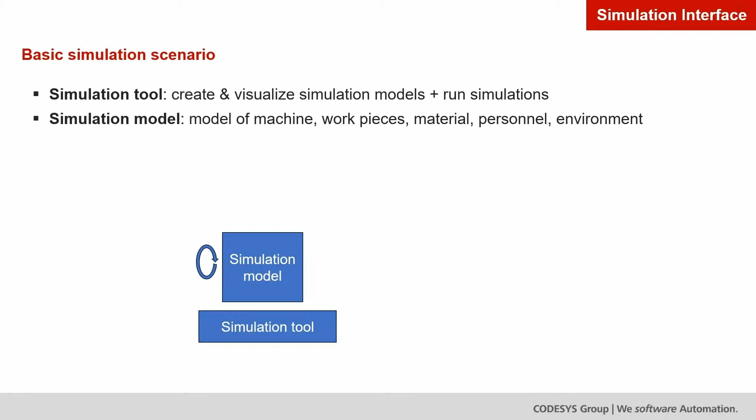It's based on a research project, Software-Defined Manufacturing, funded by the German government. The basic simulation scenario is a simulation tool which creates and visualizes the simulation models and runs the simulation. The simulation model is a model of the machine, the workpieces, the material, the personnel, the environment, whatever. A PLC connector connects this simulation model to a simulation PLC, which is a soft PLC or actual controller with a simulation interface running the IEC application.

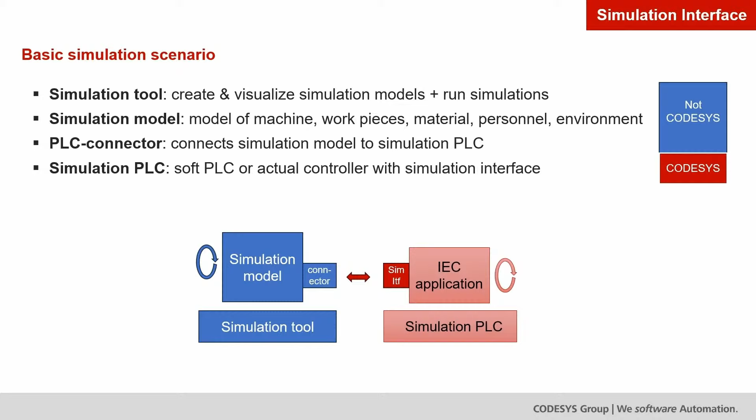The first three are not our product. Our product is the last part, the simulation PLC. A simulation may also include multiple PLCs, and these PLCs may run, for example, on the workstation of the application engineer, on some real-time platform, or even the original PLC used for controlling the machine.

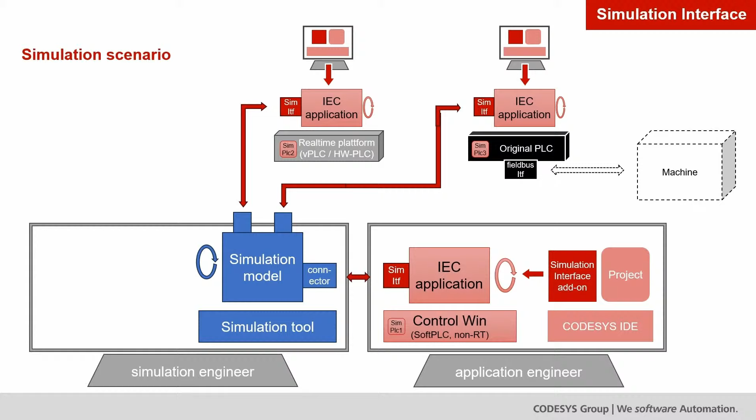The communication is done using OPC-UA PubSub, and the connection is established by an information model describing the simulation PLCs and their PubSub connections. This is hosted on an OPC-UA server, which might be a CODESYS Control Win. The information is collected from all the different engineering systems with the respective projects.

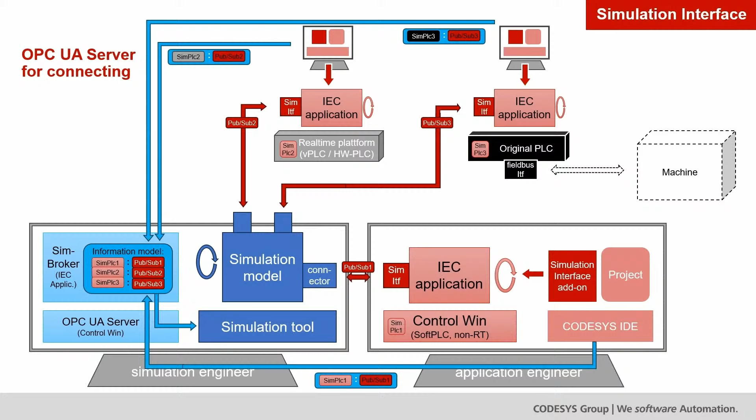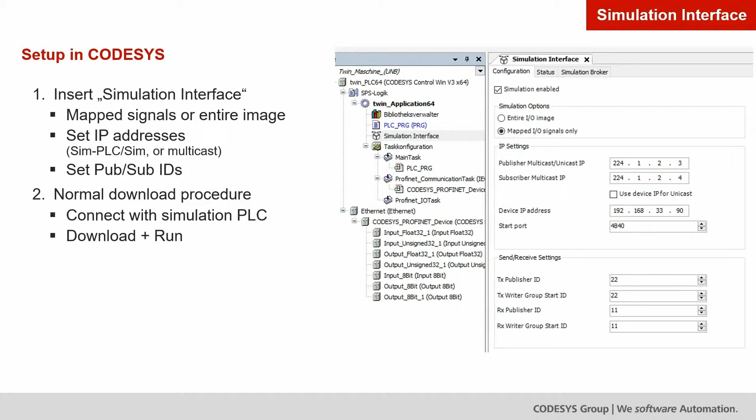The setup in CODESYS is very easy. You insert the object Simulation Interface, where you select whether you want to simulate all mapped signals or the entire I/O image. You set IP addresses for the simulation PLC and the simulation so they can talk with each other, or you define multicast addresses. You set the PubSub IDs to be used, and then you do a normal download procedure by connecting with the simulation PLC, download and run.

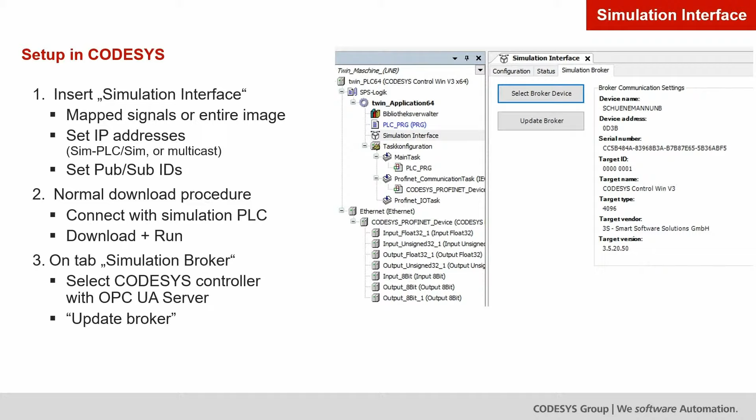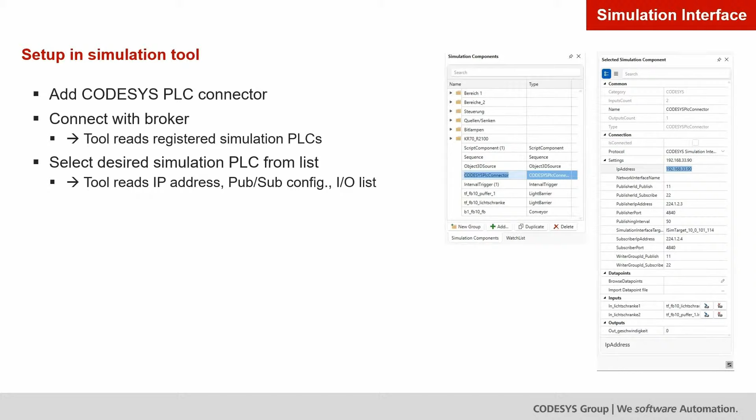Finally, on the tab Simulation Broker, you select a CODESYS controller with an OPC-UA server function as the broker, and then you update the broker, which downloads the information model. In the simulation tool, you need to add a CODESYS PLC connector, connect with that broker, and read the registered simulation PLCs. Select the simulation PLC you want to connect to. The tool will read the IP address, the PubSub configuration, and the list of I/O signals. Then you map the I/O signals to the data points in your simulation and run the simulation against the prepared simulation PLC.

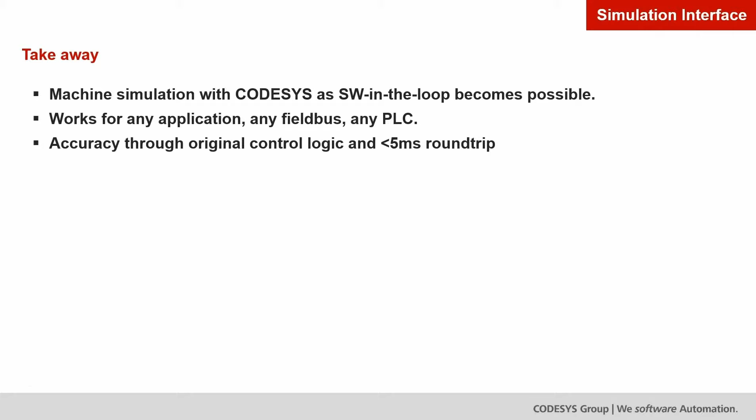Takeaways. The machine simulation with CODESYS as software in the loop becomes possible. It works for any application, any field bus, and any PLC. It is accurate through the original control logic and has a 5 millisecond round-trip time possible because of the use of PubSub communication. It's an easy setup. The application remains unchanged. You disable the simulation by a switch.

You use a file-less import of the simulation interface into the simulation based on the OPC-UA information model. All of this is based on OPC-UA mechanisms. You need an OPC-UA-based connector in the simulation tool. That's the point. There are prototypes which we showed at the SPS fair last year, and further simulation tool providers are interested.

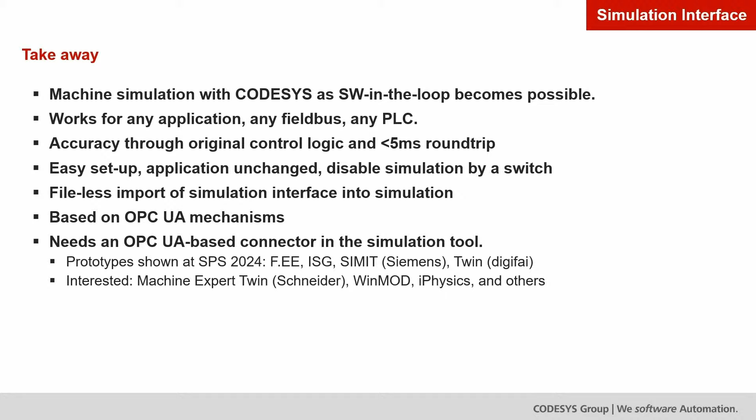Now, regarding the development system, I have to tell you something about libraries. There's an issue about updating rebranded libraries. Since SP19, new versions of libraries with vendor 3S Smart Software Solutions are successively rebranded to CODESYS. Updated libraries used in the user project, directly or indirectly, are updated automatically in SP20 and not updated in SP19, meaning they don't automatically get improvements.

Now, if an updated library is used by an add-on in the project, that is indirectly, and if that library in an add-on has a new version relying on new features of the rebranded library, like Ethernet IP 4.7 uses the new element collections 4.0, then in SP20 there's an automatic update of both, which is okay, but in SP19 only Ethernet IP is updated and there's no update of the element collections, meaning that you get a compile error.

The remedy is to manually update the library resolution in the project. In SP19, in Library Manager, you open the placeholder dialog and you update the placeholder for element collections. You select the version 4.0 with the CODESYS vendor, which is offered automatically.

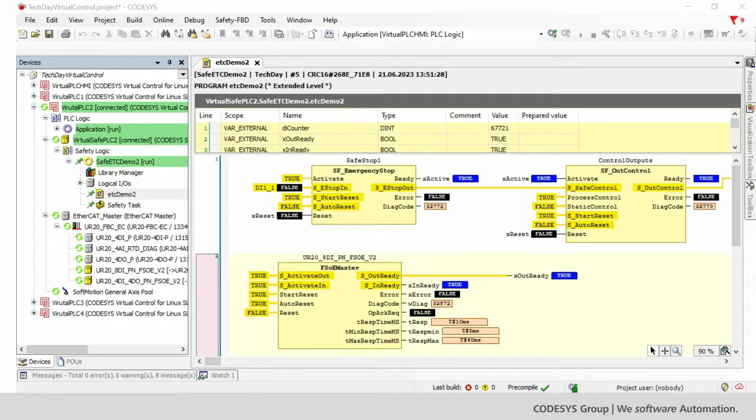Concerning the engineering of this new safety solution, there are no new tools necessary. As usual, you can still use the standard CODESYS IDE and work in the same fashion as you would with standard safety solutions. The performance of the Virtual Safe Control is also very promising. We tested the runtime with standard hardware and about 50 simulated PROFINET slaves and achieved cycle times of around 2 milliseconds.

Most of you have certainly followed the transition of the business model away from hardware-based licensing to our new application-based license model. We are also relying on this new model with the Virtual Safe Control, and we added a few new safety licenses that differ in terms of the number of safe connections. There is also a special PROFIsafe license for fieldbus communication.

Currently, the Virtual Safe Control can be used on x86-based devices in combination with PROFIsafe. However, we are also working on a solution for ARM-based devices and, of course, FSoE support. We expect to release these functionalities at the end of the year or early next year.

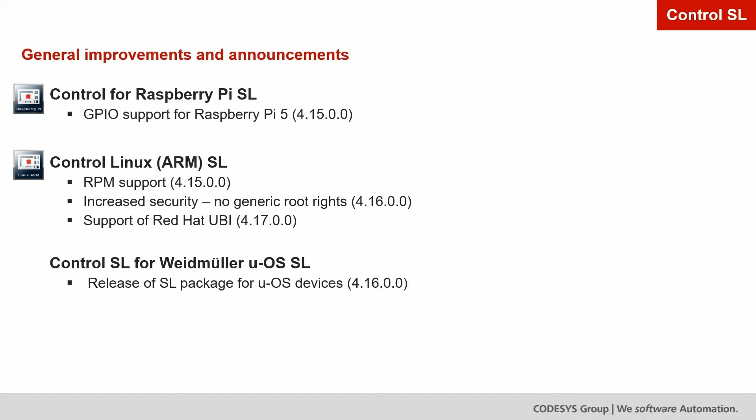And in addition, we want to increase security by removing generic root rights from our runtime products. We are aiming for a release with version 4.16 here. And in the future, we want to further extend our Red Hat support by also supporting the universal base image for our virtual control. Another new development planned for version 4.16 is the release of a dedicated runtime specifically for u-OS products of our partner Weidmüller.

To conclude, a few words about planned collaborations with technology partners. Due to the Cyber Resilience Act, we see an increased need among our customers to rely on professionally maintained firmware. We are therefore planning to expand our store offering in the direction of device firmware and are relying on well-known products here. On the one hand, this includes professional Linux distributions such as Ubuntu and Red Hat Enterprise Linux, and on the other hand, hypervisor products such as the RTS hypervisor and the CODESYS RTOSvisor.

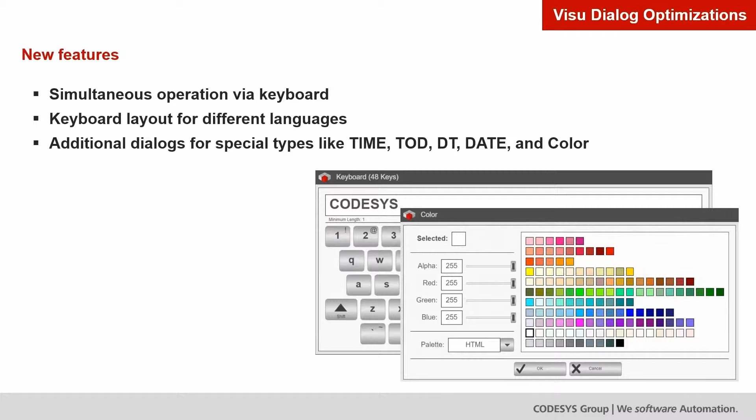Here you can see the keypad with an international layout. And here you can see a color dialog where you can configure a color value. Further improvements have been made in the area of alarms and trends. Using alarm group templates, it is possible to define alarm conditions for a type such as a function block. All instances of this type are then monitored for the alarms automatically.

With the next version, Visualization 4.8, a new observation type, Alarm API, can be used. This is characterized by the fact that the active and inactive state of an alarm can be set directly by the function block. As an example, I will show you two methods of a function block, how this API can be used.

The first method is activate alarm. The API method calls activate alarm instance with a THIS pointer from the current instance and the ID from the alarm, which should be activated. Here you can see the method for deactivate alarm instance.

In this way, a function block can monitor and trigger the alarms itself. A major advantage is that the alarms are triggered in the task where the function block instance is called. The timestamps then show the exact sequence of the alarm sequence within the application.

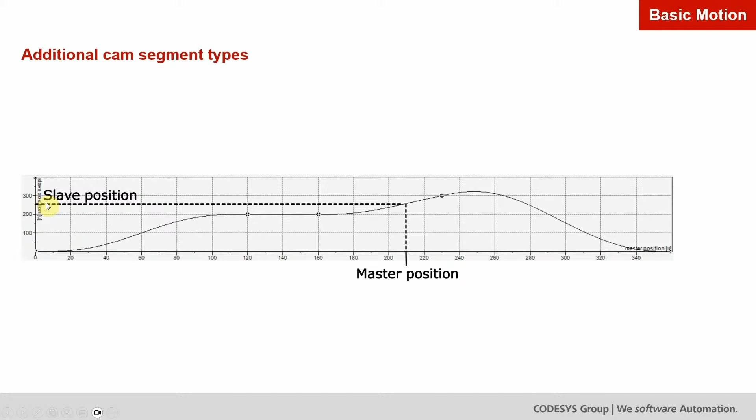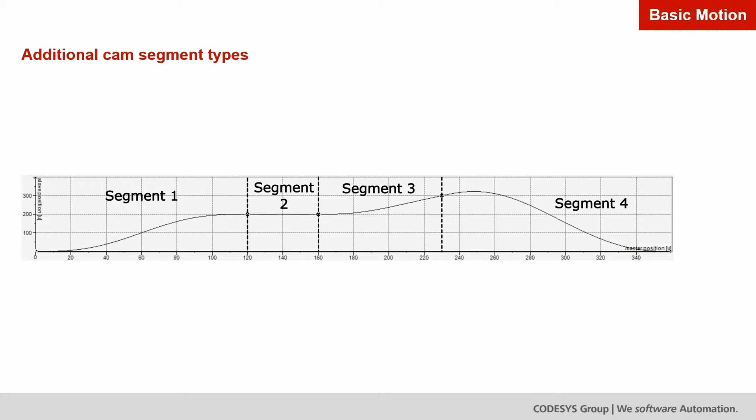The relation between the master and the slave position is described by different segments, which in the end are mathematical functions. The cam on this slide has 4 different segments, and each segment can have a different mathematical function. The slave axis will follow the path defined by these segments. And this represents a cam.

With SoftMotion 4.18, we add two new segment types: the inclined sine and the modified sine. The inclined sine requires velocity 0 at both boundaries, so it can only be used for movements from standstill to standstill, so-called dwell-dwell movements. In contrast, the modified sine allows setting different velocities at both boundaries.

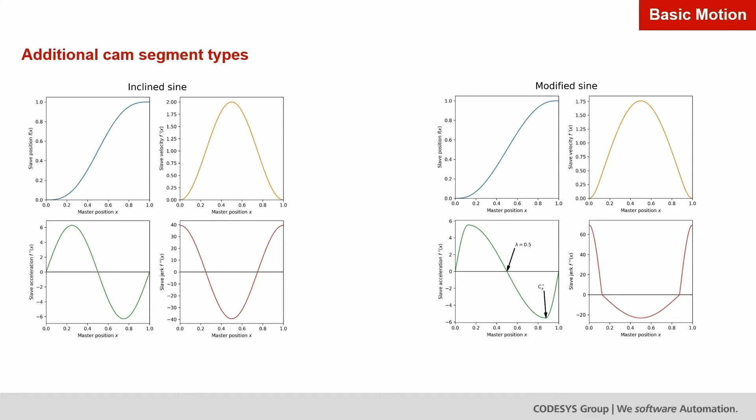In addition, the shape can be fine-tuned using the inflection point parameter lambda or the maximum deceleration parameter CA star. The new segment types can be used with both the CAM editor in the IDE and with the CAM Builder API.

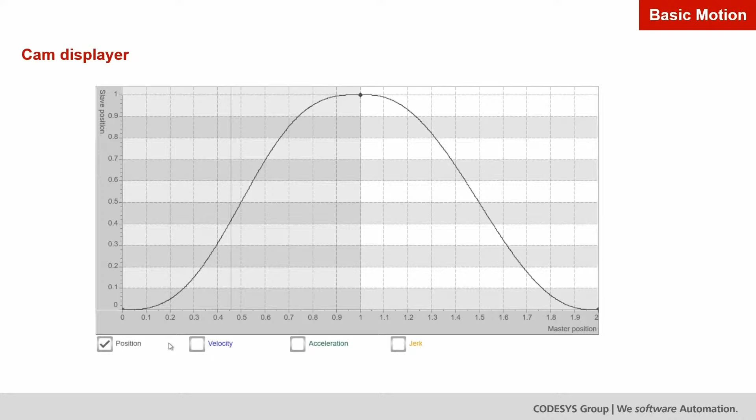To visualize cams in your user interface, we added new elements to view or edit cams. First, we start with the cam displayer. In the cam displayer, you can view the cam including all derivatives. The different values can be shown or hidden as desired. This is especially useful for cams that have been created programmatically.

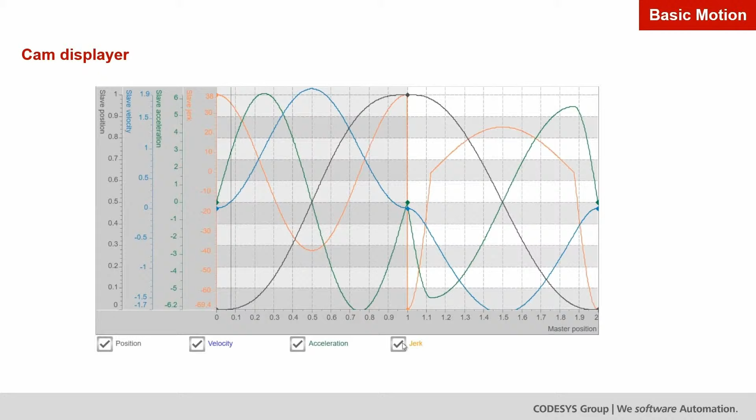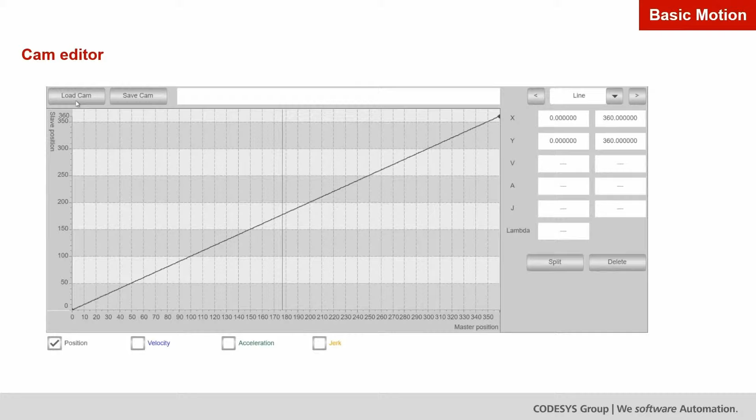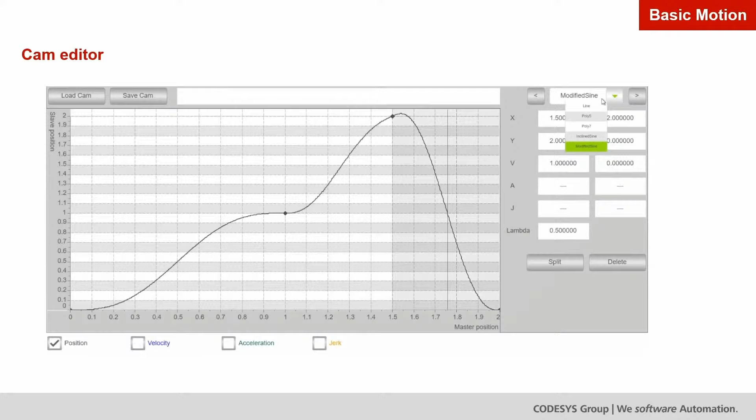Next, we have the cam editor. This element can be used to change cams during runtime in the visualization. You can load the cam, select a segment, create new segments or delete them, change boundary values, and change the segment type. Finally, you can save the cam and use it in your application.

The next feature is a high-precision digital cam switch. Let's take a look at the following example. We have an axis moving from position 0 to 360. We want to apply glue to a product starting at position 90 and ending at 120.

Since the glue gun has a delay between activation and actually dispensing glue on the product, we want to enable the glue gun 50 milliseconds before we reach position 90 and disable the glue gun 50 milliseconds before reaching position 120.

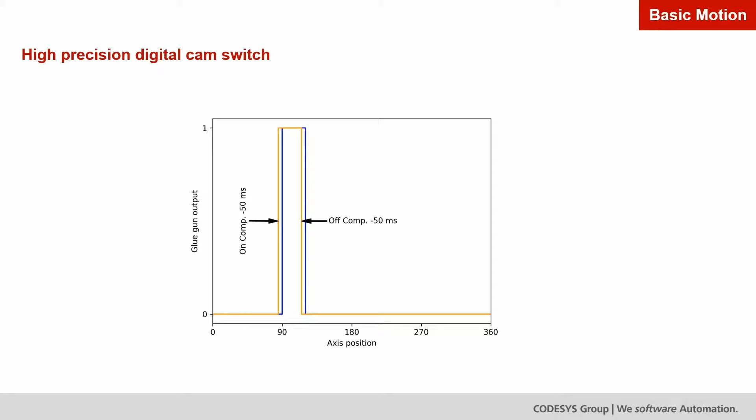We already have two function blocks to solve this problem, namely MC_DigitalCamSwitch and SMC_GetTravelTime. However, both have disadvantages for this application. The accuracy of MC_DigitalCamSwitch is one fieldbus cycle. There is no information on the time within a cycle at which the output should be switched on or off.

This problem could be solved by SMC_GetTravelTime, which has sub-cycle accuracy. However, for our example, we wanted to enable and disable the glue gun 50 milliseconds before reaching the position. And with SMC_GetTravelTime, this on and off compensation needs to be done manually in the application code.

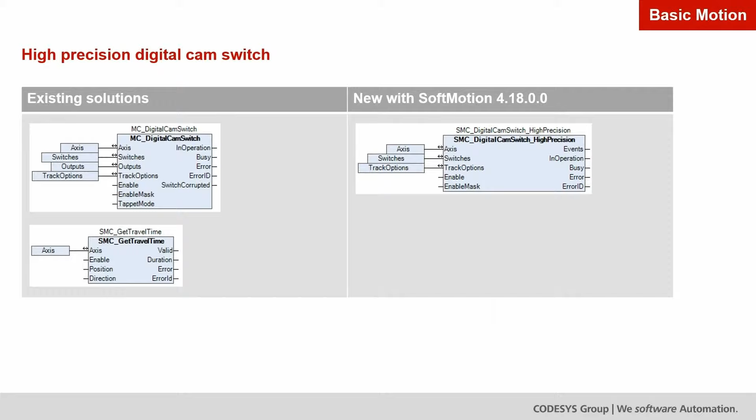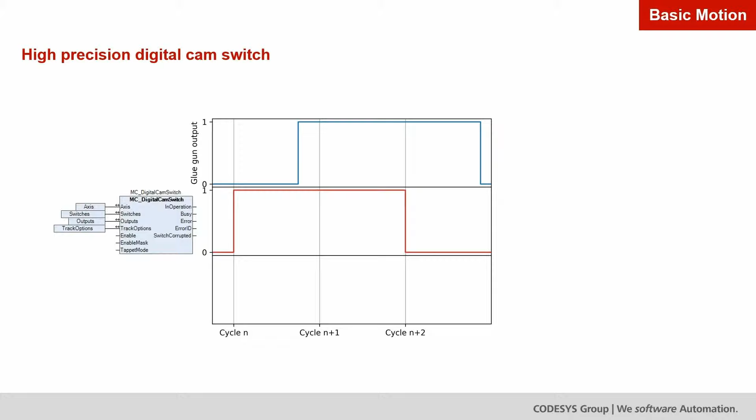MC_DigitalCamSwitch would enable the output for the whole cycle n and disable it at the start of cycle n+2. For some applications, this might not be precise enough. For applications that require this level of precision, SMC_DigitalCamSwitch_HighPrecision can be used together with a high precision digital output card. As you can see, it is possible to activate the glue gun with a sub-cycle time accuracy. Even with higher PLC cycle times, you can precisely control the outputs.

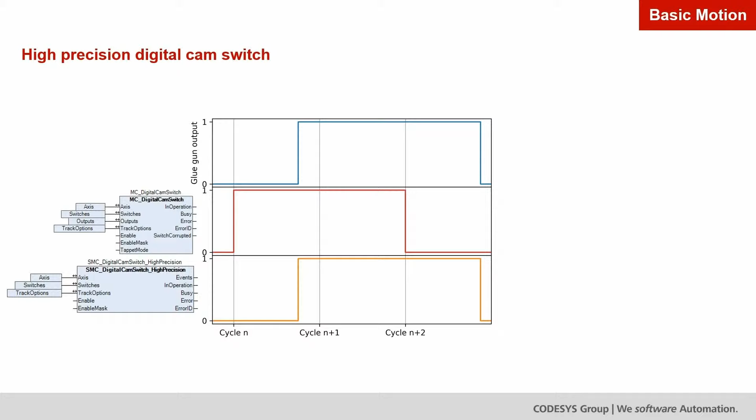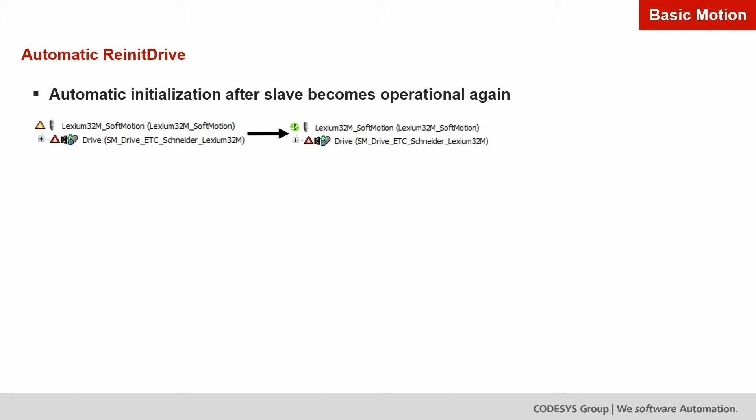Next, I want to talk about the automatic initialization of the soft motion axis. Let's consider a case where the slave has an error. This also leads to an error for the soft motion axis. When you have enabled an automatic restart of your slaves, the slave will restart and return to operational. Previously, you then had to use ReinitDrive to reset the soft motion axis. Now, the soft motion axis also automatically restarts after the slave becomes operational again.

Another case is when the device is initially disabled. When both devices get enabled, first the slave becomes operational. ReinitDrive is no longer necessary to initialize the soft motion axis, and instead the axis automatically performs the initialization. In summary, for these cases, it is no longer necessary to use the ReinitDrive function block.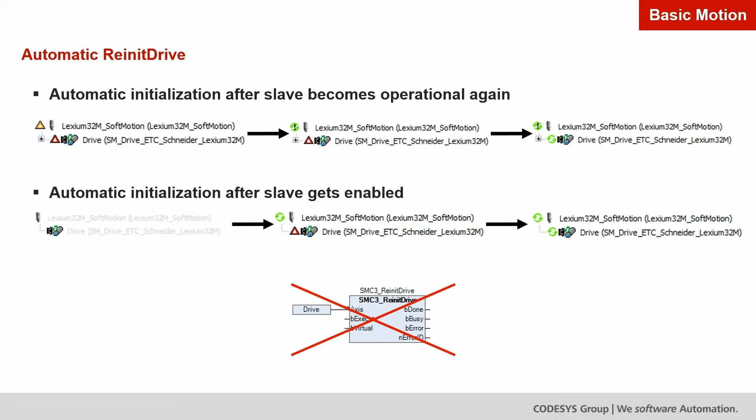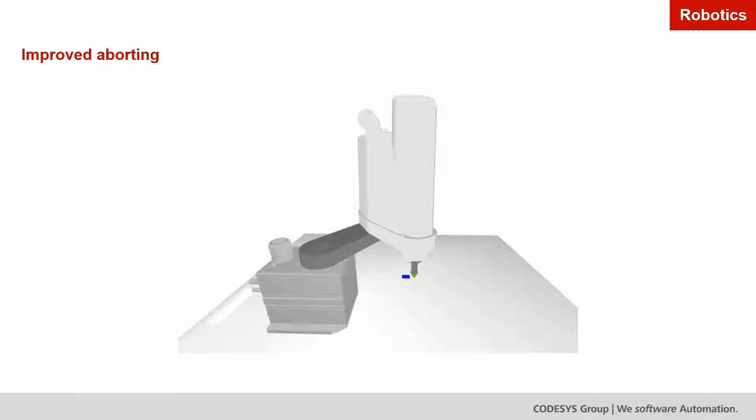Now let's switch to robotics and our improved aborting. An aborting movement is used for immediately changing the ongoing movement of a robot. A use case could be to change the target position of the active movement. This can be seen in the video. We have a SCARA robot which performs two movements. The first movement is highlighted in blue and the aborting movement in orange.

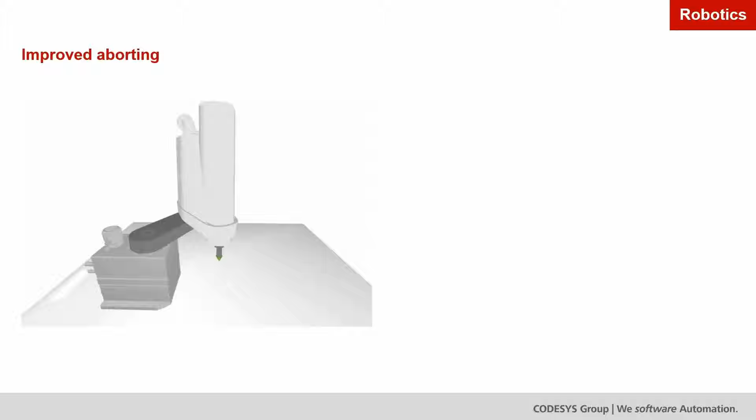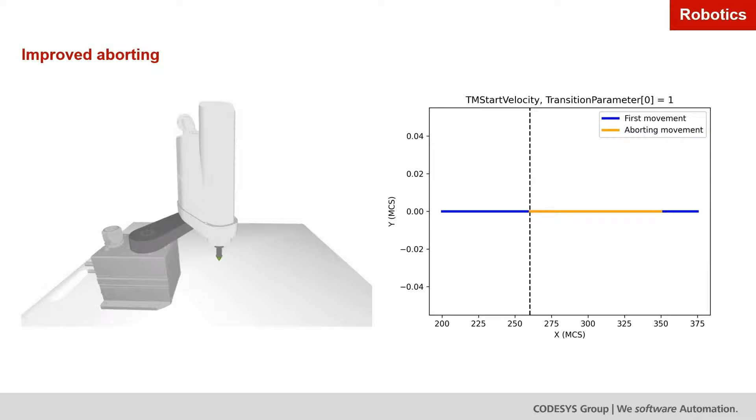In this example, the robot moves along a straight line. The graph on the right displays the same movement as in the video. The X and Y axis are the X and Y coordinates in the machine coordinate system. The first movement was commanded from X position 200 to 375. The aborting movement was commanded at X position 260 and changed the target position to 350. Let's look at how this movement changed with SoftMotion 4.18.

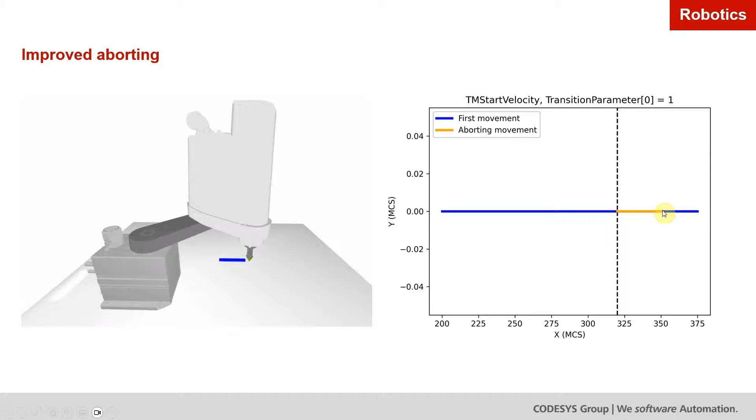Next, we have a similar case as before. The difference is that the aborting movement is commanded later and that the new target position is not far away from the actual robot position. With the given dynamic limits of this movement, it is not possible to reach standstill at the new target position, and instead the robot will overshoot this position and then needs to move back. As before, with SoftMotion 4.17, the movement comes nearly back to the position where the aborting movement was commanded. With SoftMotion 4.18, the robot just moves back to the target position and stops.

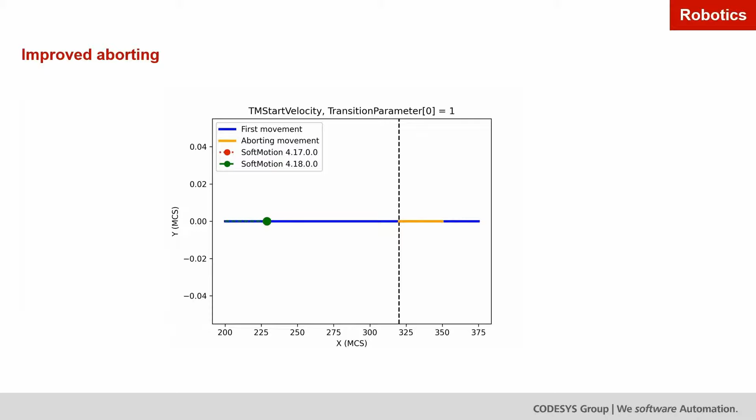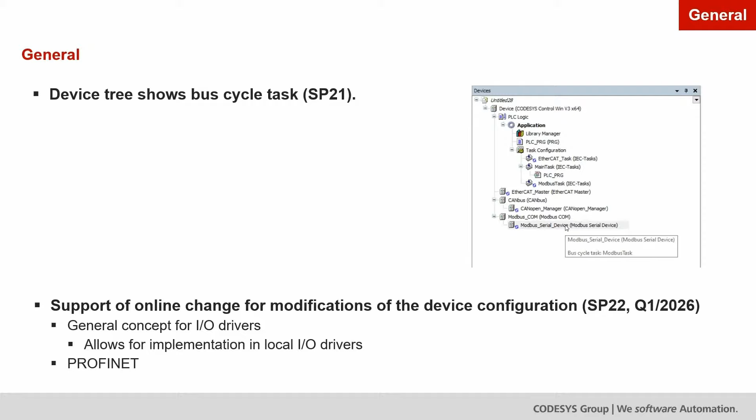Then we have decided to tackle a major topic in the area of devices and field buses: online change for devices and device settings. This requires some far-reaching changes to the device concept and will probably only be available in Service Pack 22, that means in 2026. For now, we are concentrating on the drivers for the local I/Os, then on Profinet. I will keep you informed about this.

CAN-FD has now been implemented as a CODESYS communication protocol between the programming and the runtime system. The changes have been made in the essentials part of CODESYS and in the runtime system. They can be used with Service Pack 21. The final release, which also includes convenient editing of the gateway settings, will be done with Service Pack 22 next year.

You can also use Layer 2 communication with CAN-FD in your application. However, there are currently no plans to support FD in our CANopen solution. For CANopen, we've released a new version in January, which mainly contained bug fixes.

We are also currently working intensively on Modbus. A particular focus is on redundancy issues. We will be supporting network redundancy in the next version, around the middle of the year.

The precondition for this feature is that the server devices, formerly called slaves, are able to establish two connections to the client. The client, formerly called master, switches to the other if one of the connections is lost. This allows the operation of the devices to be maintained if one of the communication paths fails. You can specify a preferred connection and in the application use function blocks to monitor the status.